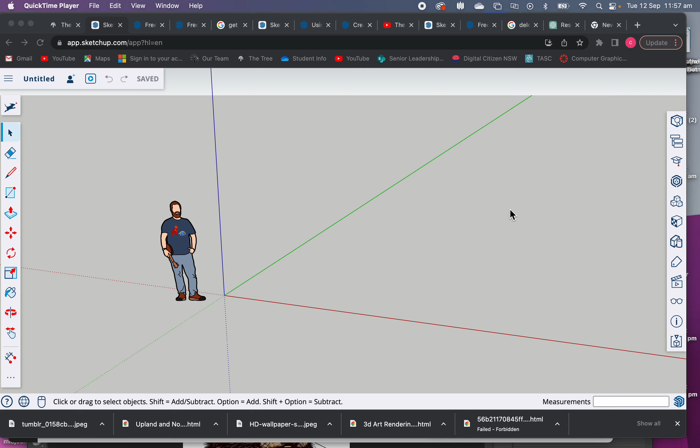Have a look today at building a really super simple house or two, and just at some basic tools to get you going in SketchUp.

So what I'm going to do is I've got a file open here. I've got our basic ukulele player here. So let's get rid of them, we don't need them for this exercise. We're not going to worry too much about measurements today, we're just going to get straight into it.

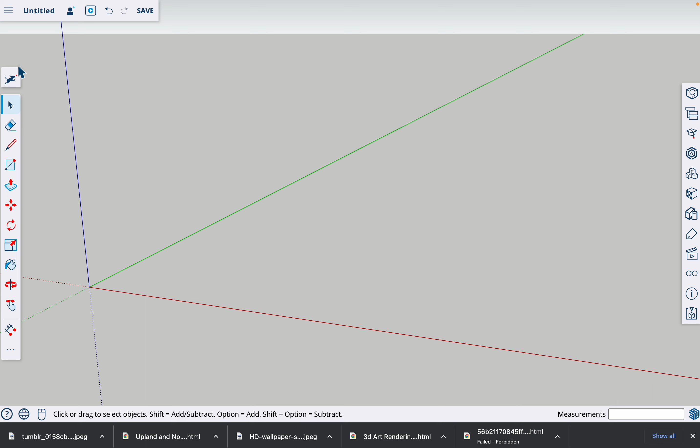Okay, so this is our tool panel here on the left-hand side. I'm going to grab our square and click once down here and drag my square out. I'm going to build, just for starters, a simple square house. Done, so that's my floor plan of my house. I haven't measured it out, but I'm just sort of guessing the size.

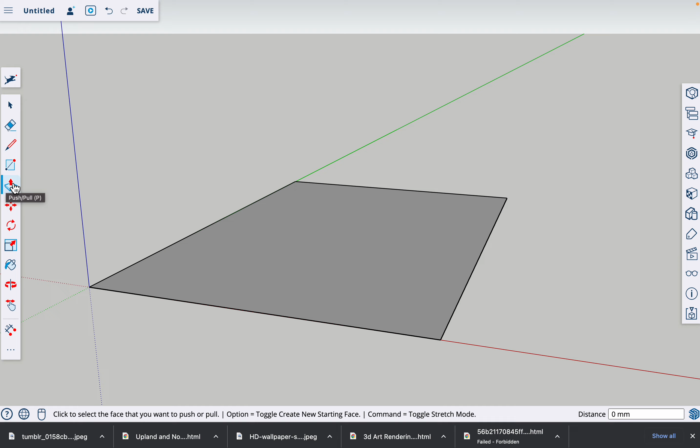I'm going to grab this tool, which is called the push-pull tool here. You can use P to select it as well. I'm just going to start dragging the structure of the house up like this.

And I'm just using, you can use this rotate tool here, or they call it the orbit tool, and we can rotate around. That's cool. We're going to add in a roof.

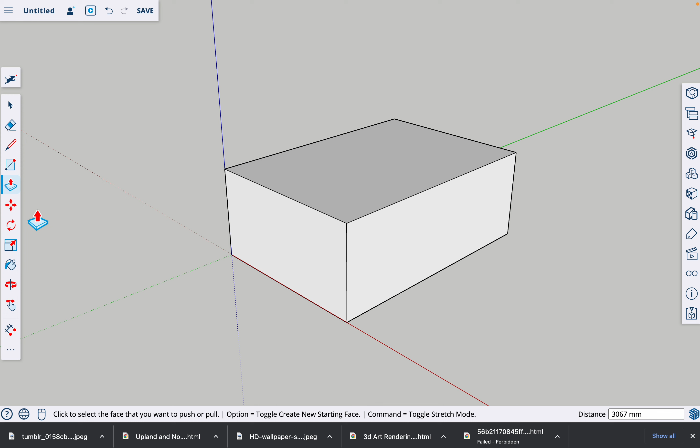I'm going to use this pencil, which helps us to draw in geometry. And I'm going to come straight up. Now I can hit my up arrow key, see how it lights up this pencil stroke blue. That means it's going directly up and down. I'm going to click once, that's good.

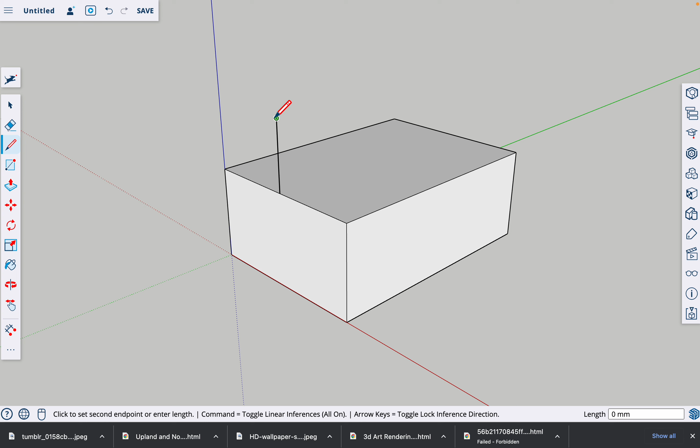And I'm going to draw over here, and I'm going to use my pencil and join this up here as well. So whenever we create a loop of 3 sides or more joined together, SketchUp turns it into a face, if it can.

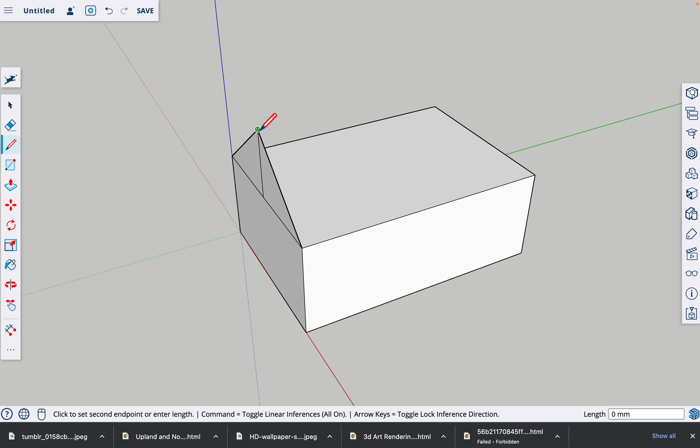Now I'm going to grab my pencil tool, select the endpoint up the top here, and move out. Now, how do I know which way my pencil's going? I want to go along on the green axis. I can hit my left arrow key on my keyboard, just press it once, take my hand off, and it's going to now be stuck on that green line.

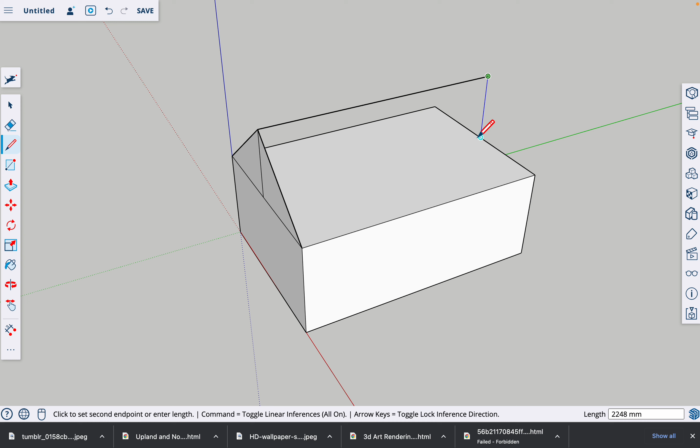If I bring my pencil and just touch the edge of my building here, you can see that it now knows how long to make the green line, makes it the same length as my house. Click once, that's good. And then I can join up the dots and you can see it's made me a roof, okay? Nice and easy.

If you've got extra lines like this one here in this seam and you don't want it, you can just go across using the eraser and get rid of it. That makes things nice and easy.

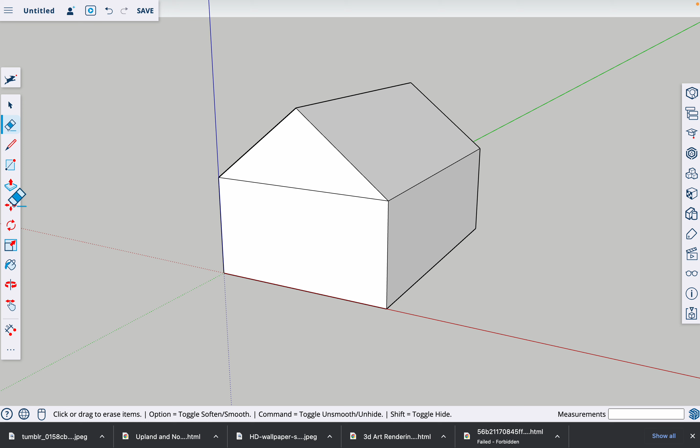I'm going to put a door into my house, just a basic door like this, okay? So I can draw it out whatever height I want. It'll stick to the wall. And then I might just push it in a little bit so it looks a little bit more three-dimensional.

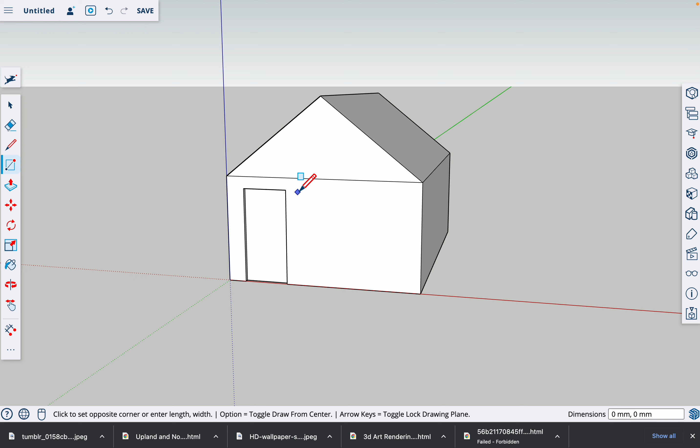That's cool, and I might do a window. So again, this is a very basic house structure, but let's just pop a window in here. And I might push it in as well, so let me start pushing this in. You can see I can push my window right in.

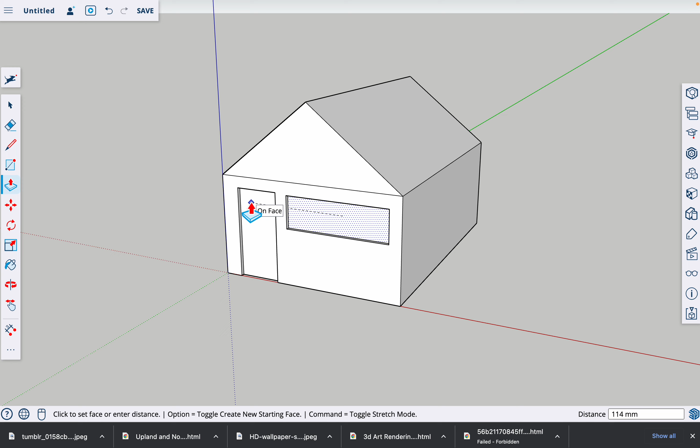I can also touch on, say, the door, and the push-pull tool will make it go in the same depth as the door. So this is called inferencing. I'll do that, okay, and my window and my door have got the same sort of dimensions, so as far as the depth they go in, that's good.

Okay, so it's coming together. Maybe I want a little bit more shelter over my door, so I could pull the roof out a little bit, give it a little bit of overhang so the rain doesn't kind of drip into the door so much. That's pretty good.

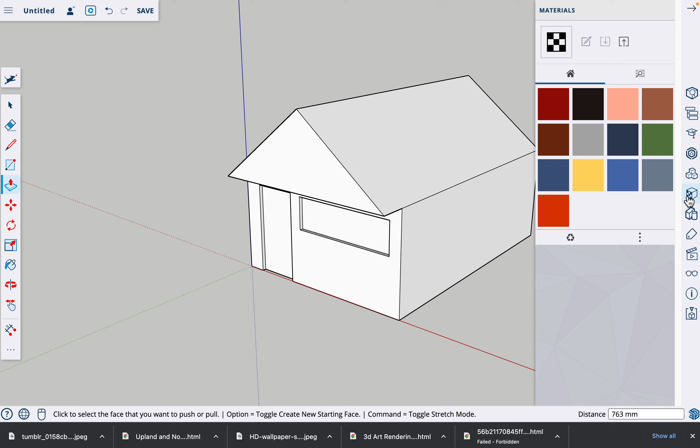Now, we can see at the moment, I haven't really got any materials on the door and the window, but we can fix that. So for the moment, we could click on this square cube here, and this brings out our materials. We've got some basic colors here. So if we wanted to click on a color, I'll click on this gray one.

I could give my roof a color just like this. So the paint bucket means that we're painting. Yep, great. Okay, so we've got some sort of roof on our structure.

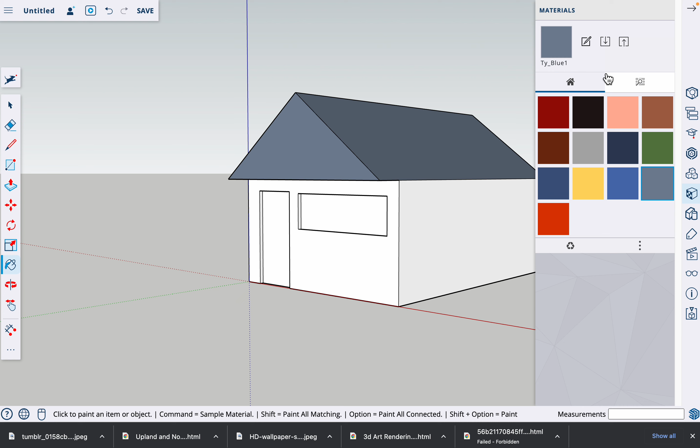If we click on this search-type icon with a magnifying glass, we can come down here and it's got all our different materials. Let's go to glass and mirrors, and this gives us different glass materials. I'm going to click on the blue one, come over, click on the window, click on the door, and you can see I can now see into my structure.

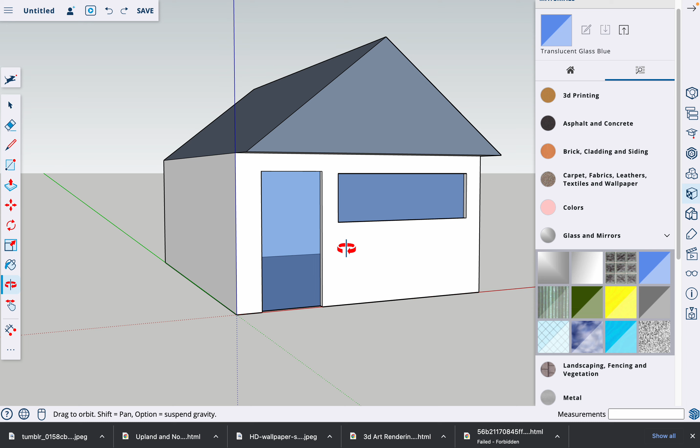If I wanted the door completely open, I could select that and hit delete, and it would be totally open. Or if I wanted to put a frame into my door, so it adds a little bit more realistic appearance.

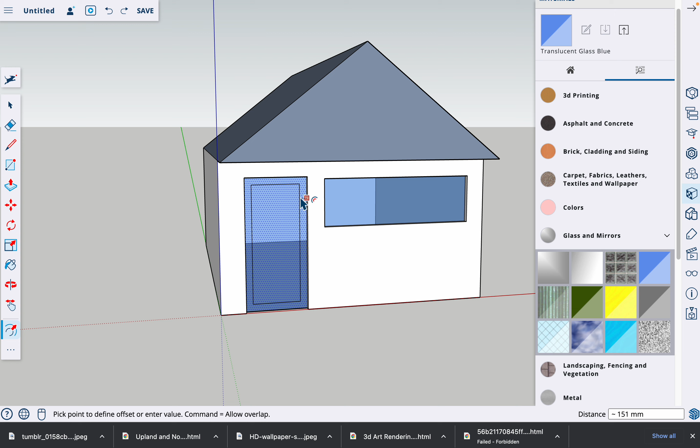I might come down to this tab down here, this shows us more tools. Click on it once and it all folds out. There's this great tool called the offset tool. We can click on a surface and bring it in like this, and it allows me to create a frame. So then I might go back and grab a color from the home menu, maybe this one.

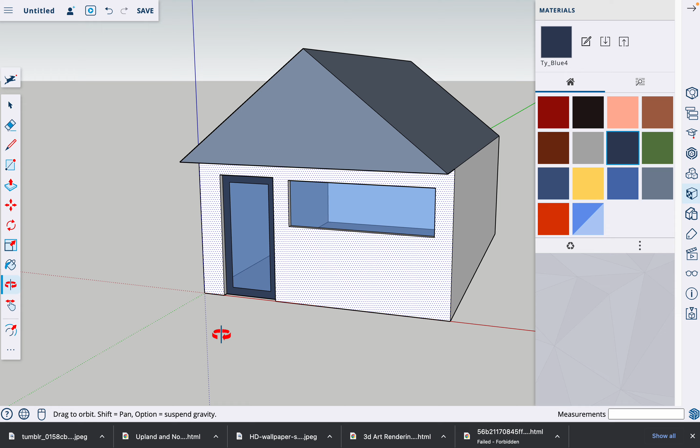That's good. The paint bucket works just like paint coming out of the bucket, and I can click on that and it makes me a nice door frame so I can get things going. Okay, so that's giving me a basic house, and I could add more windows and doors using my square tool.

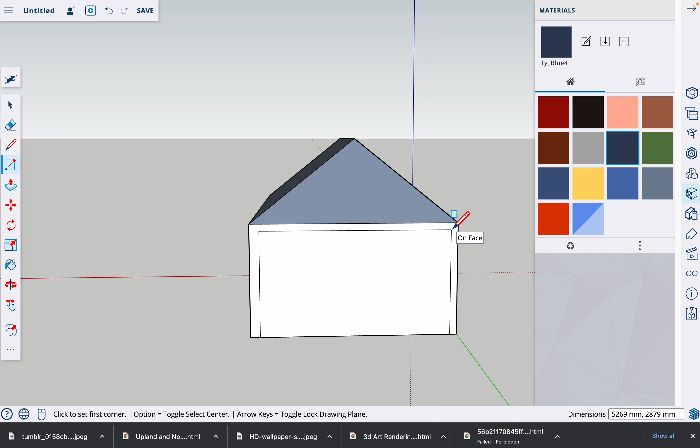Let's come around the back. Maybe we want something a bit better out here, so I might draw out a bigger section so it's open at the back, and I'm going to use that tool again. I'm going to select, using my arrow.

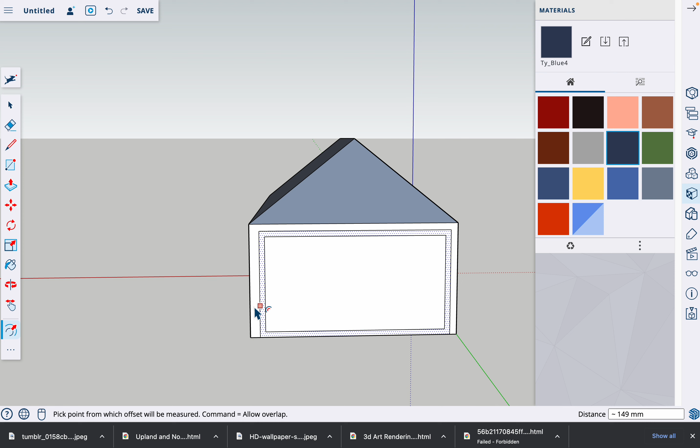Sometimes it's a bit slow to swap tools. I'm going to select that face, see it's all lit up with those blue dots. I'm going to grab this tool and give myself a bit of a frame there. I might colour that frame again that same sort of blue, and use that glass, and then we've got a big glass door that might open at the back.

A few students have been asking how do we make a pool. So if we were going to make a pool, we might grab our pencil tool and rule out, clicking out in that direction, the red direction. So I'm going to do that auto inferencing again.

This time I'm holding down shift while it's lit up on the red, which constrains it, and I'm going to touch this so it's the same width as my house, and then I'm going to come right back. So that is what we're going to make our pool into.

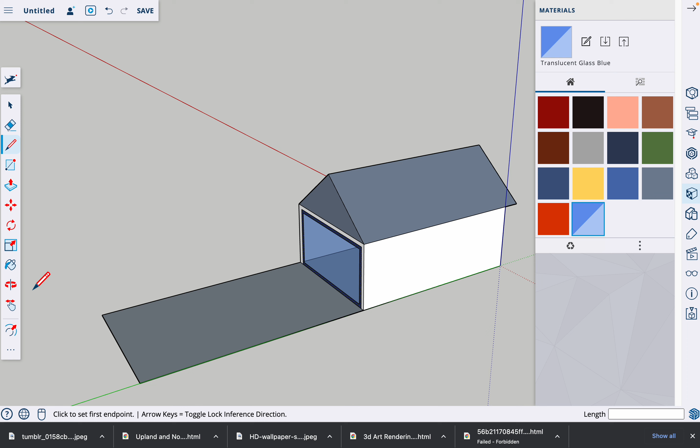Let's use that tool we used before, the offset tool. I'm going to click on it once, drag in, so that's going to be my pool. Now I'm going to select the middle and pull down, and you can see my pool is starting to come together.

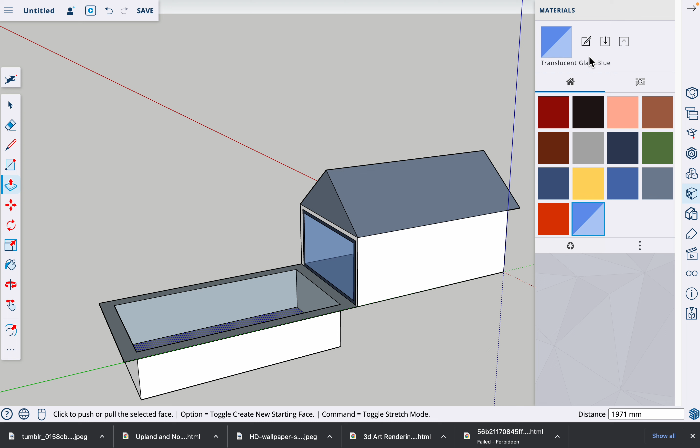You'll find in this there are tiles, 3D printing, brick cladding, siding, metal patterns, roofing, stone, tile. Here's some tiles, maybe we want some sort of pool tiles. Well, this one looks pretty good, let's pop in some pool tiles around our pool.

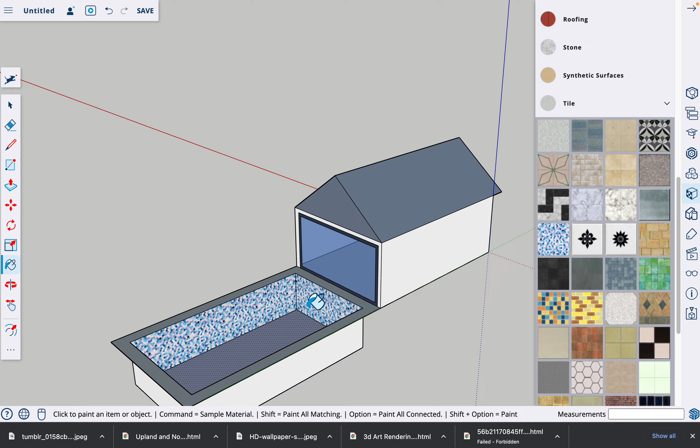Okay, that's fine, we've got all that there, and we're ready to put some water in. Now we're going to use Twinmotion to put the water in later on, which is really good, but just for now, an easy maneuver to do is go X-ray.

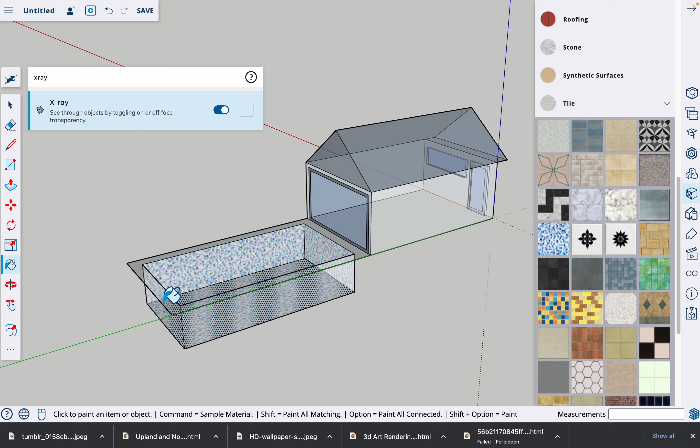So this is a search bar up here, I'm going to click on X-ray. I can sort of see through my pool now. It's just going to make it a bit easier to draw a square into my pool structure, which is going to be the top of the water. So I'm going to click once and start dragging it out. It might go a bit weird and try to stick to the walls. If I hit my up arrow, it's going to make the square be vertical.

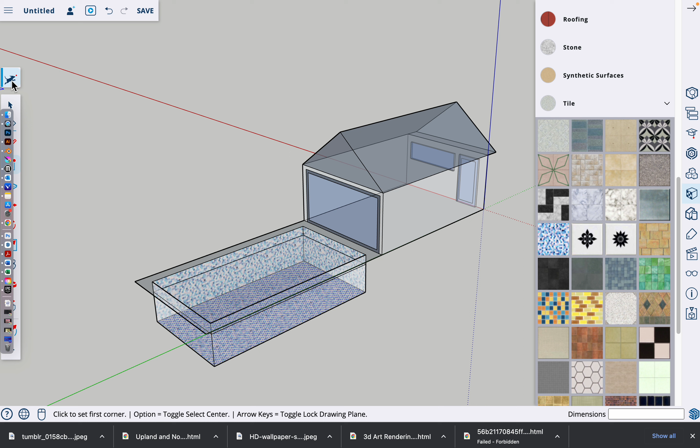So, yep, it's lit up blue. Okay, I've got the pool water surface drawn in. I might turn off X-ray so I can go search again. Okay, and I know in here I can fold this up. Water, here's some water. Let's grab some nice pool water, and we can just paint some pool water on the surface.

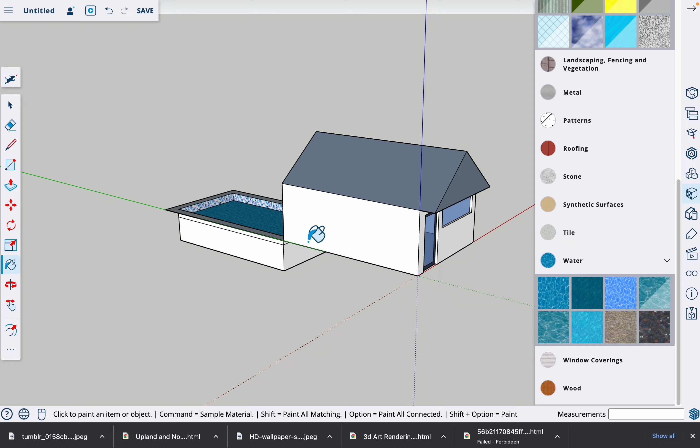Okay, so we're starting to build ourselves a house, and it's starting to come together. If we wanted to extend our house, we might grab our pencil tool, draw up the side of our house, and then we could use that push-pull tool again, and we could pull it out. Only thing, SketchUp can be a bit touchy. Often we need to select it first, and then we can pull it out.

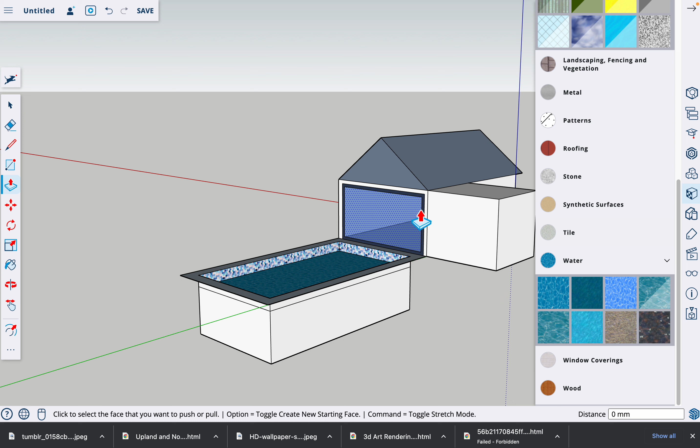Maybe then we want to come along the pool edge, so we might have a bit of a courtyard. We might click up here, just draw this in. Okay, so SketchUp needs these crease lines so it can then come out. I could do some auto inferencing by touching on the pool edge. It's a bit hard to at the moment. I might just improve my view, touch it on this edge, and there we go. We've got our building the same.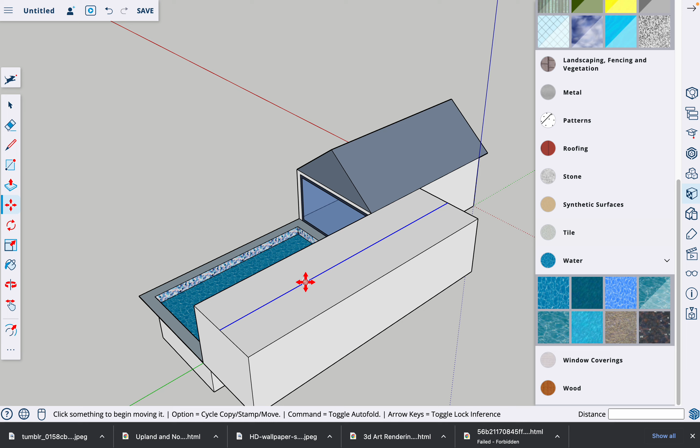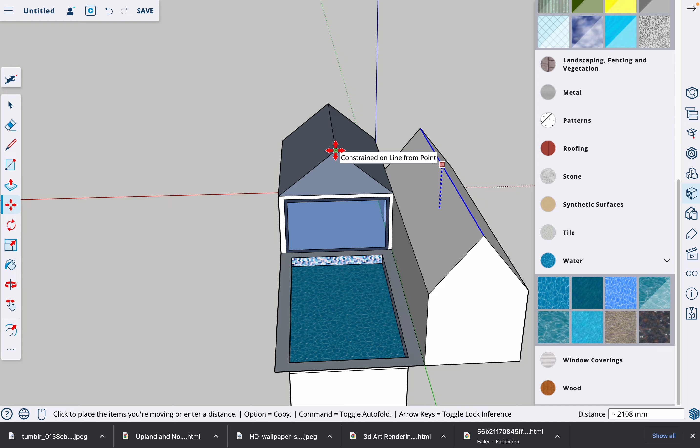I'll show you another technique for doing a roof. So we can click here and we can go point to point, like that. So I'm just drawing one and I'm going to do what's called autofold. So on this one, I'm going to use this move tool, which is this red cross. I'm going to grab this and I can move it straight up and down. If it's wiggling around and getting crazy, just hit my up button and it'll make sure it moves only in the up direction. That's good. Actually, that's not good. But what I might do is pull that up, hit my up button and touch on the other roof, and it's going to make that roof the same height as my other roof.

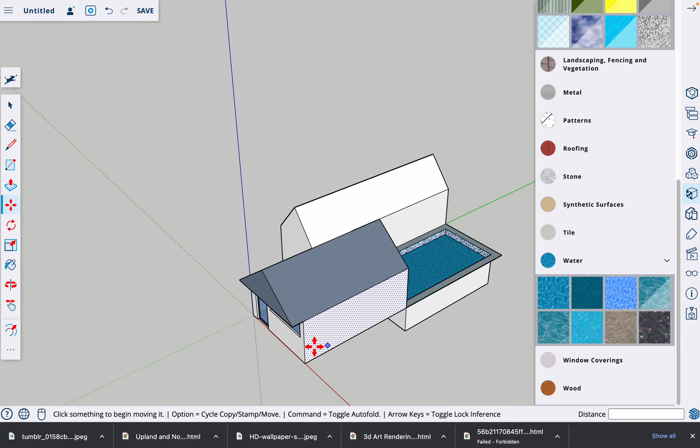Perfect. And you can start to build in extra windows, build in extra doors, and we can see that inside the building there, that's all joined up and it's cool. Okay, so you can start drawing out your buildings like this. If you want more land around your building, you can grab your pencil tool and you can just sort of start drawing around.

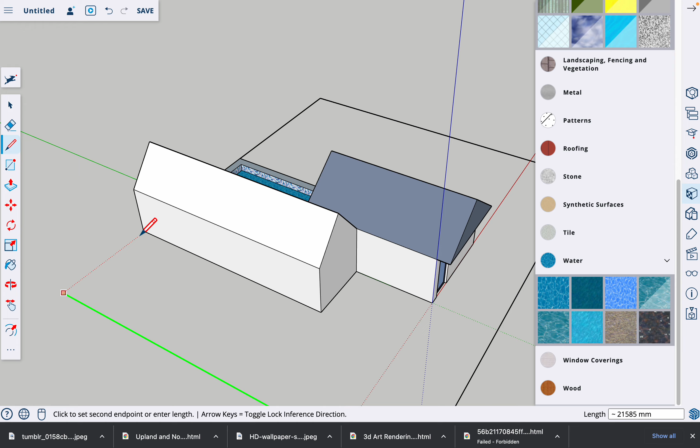That's cool, okay, and I'll join up to there, okay. So now you can see that I've got some land. I could choose to put, say, some grass on that. I could start adding extra details. Maybe we want a nice little covered in area over here, so we could slice across here.

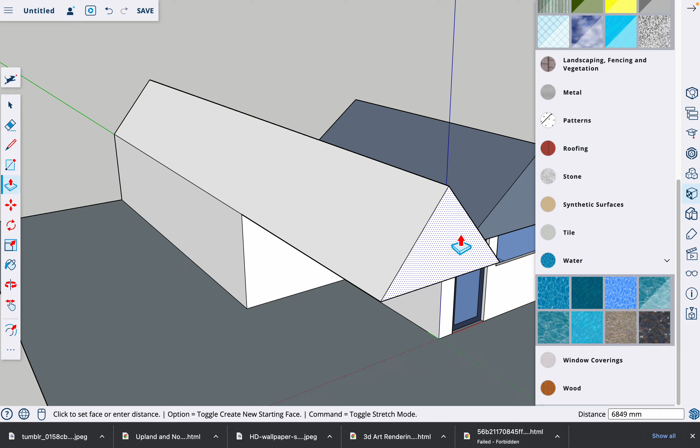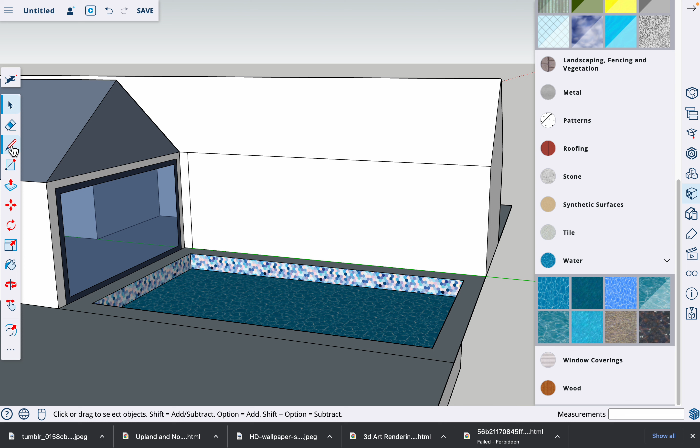Drag this roof out to touch that one. Maybe that's where the car can park in there. Let's have a look over this way. Let's put in another window. So I might just go here. What if I just go straight up there? And I might come... oops, it's a bit slow grabbing the tool. I might just leave a bit of this here and I'll come down, and then I could choose to, if I wanted to, drag that in as one big glass panel.

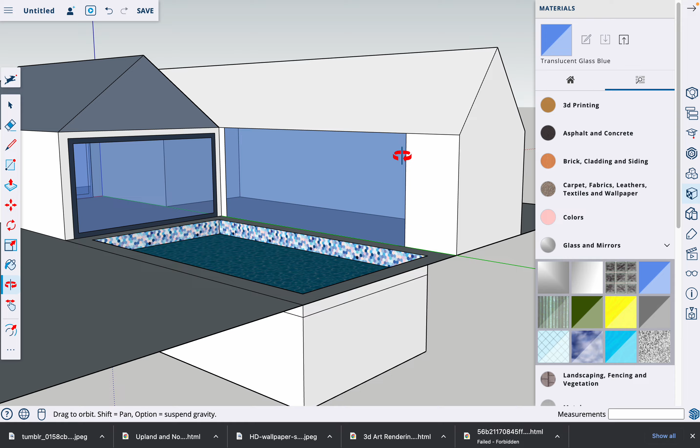That's good. I could put cladding on the rest and colour it in. But once you get going, you'll soon be able to build up some really interesting structures.

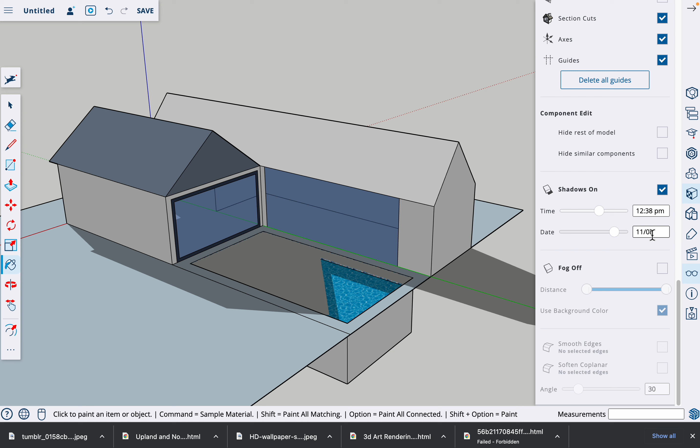If you come down to the glasses tab, you'll see here that it's got shadows. So shadows are turned off at the moment, so let's turn our shadows on. Great, okay, so we can see that, yeah, we might need to think about the shadow, pool's in shadow at 1:30 a.m. Or was that 1:30 p.m.? Yeah, 1:30 p.m., that would make a lot more sense. But we can see how the sun changes during the day, which is great, and we can see how it works during different times of the year as well. But if we're going to get into that, we need to set the exact geolocation.

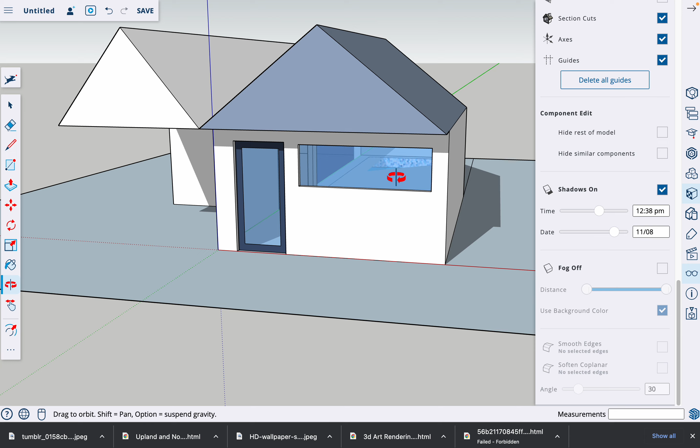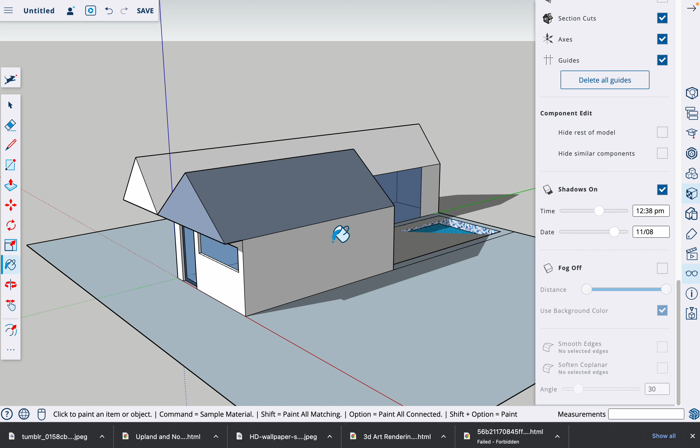So that'd be a good kind of C structure. And then if we're moving towards A, let's aim towards a couple bit more complex roof line, getting a pool, getting some shadows, and getting it looking nice and good. Have maybe a bit of garden, and you'll be on your way to an A. So that's where we're at, it's just our first little structure, getting the look and feel of SketchUp.